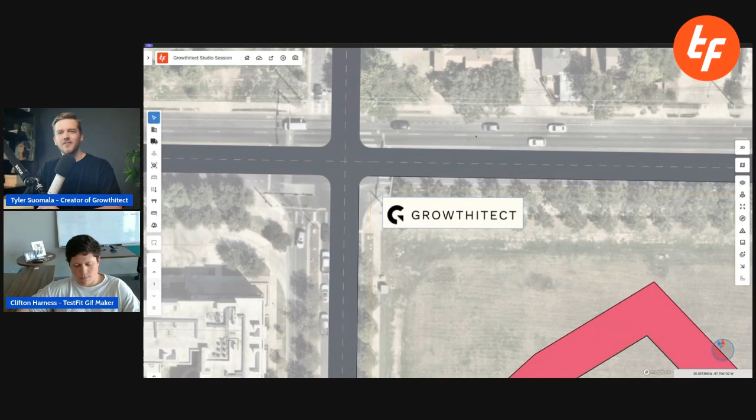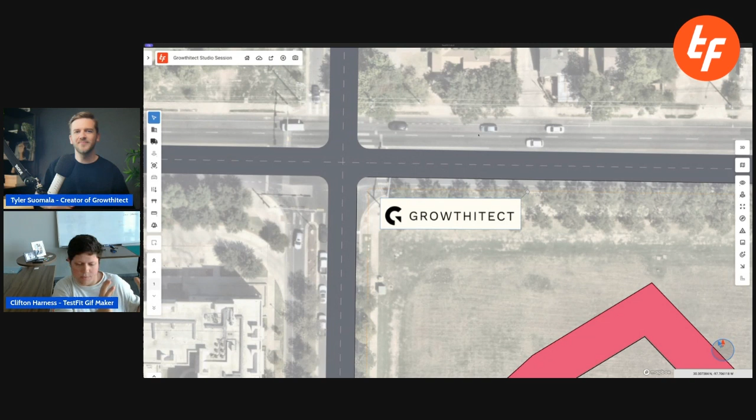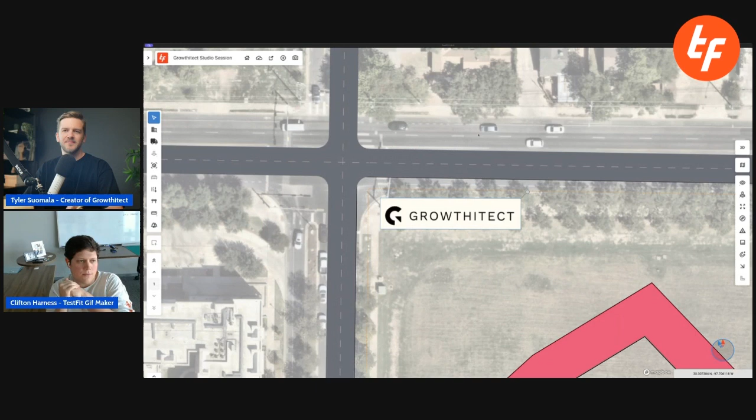Sounds great. So the demo has three main parts. First is Urban Planner, which is planning at an urban scale, trying to get blocks to be the right size, getting rough orders of magnitude in the right spot. Then we'll move into Site Solver, where you already have the block and you're trying to figure out the highest and best use building for it. And the last thing is generative design, where you already know what that building should look like, and it's a matter of running through 30,000 really bad options to find one you might turn into architecture. I'll start with Urban Planner.

The purpose of Urban Planner is that top-down view, looking at a big street grid. So this block right here is 8.76 acres, this block right here is 6.74 acres, and it's all divided by roads.

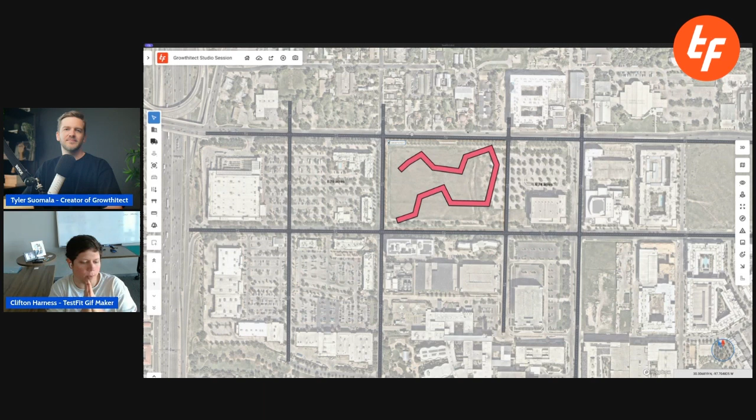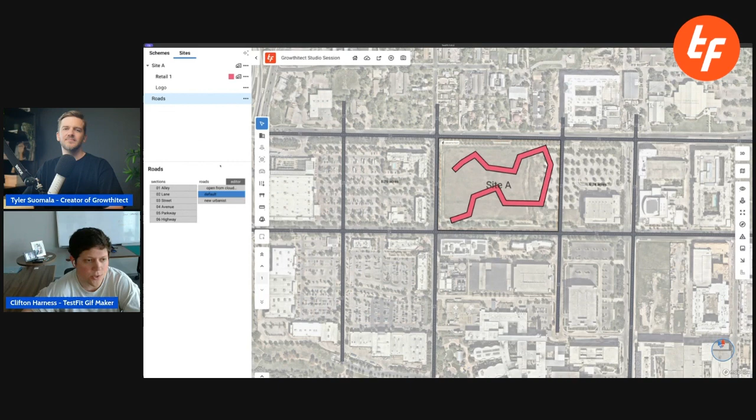You might ask yourself, why are you using roads? TestFit is based in America. We are car brained, we are car dependent, and the only way I can create software that people will buy is to respect the current process of being car dependent. So what we've built is a street section tool loosely inspired by StreetMix, which if you go to their website is a great open source project that shows different street sections and how they interact from a section view.

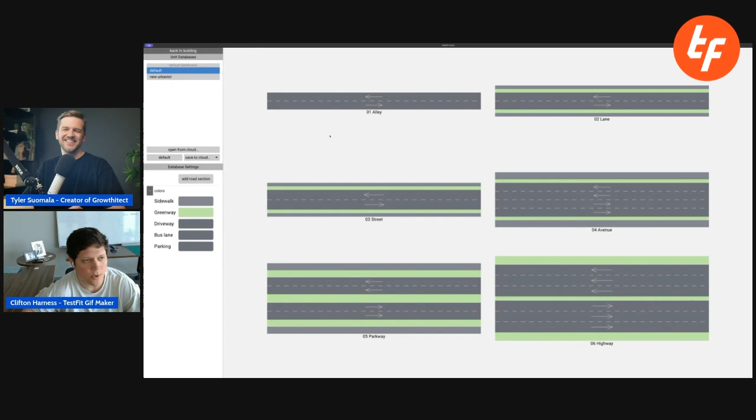What we've tried to do is port this into a plan view. So you can go into the editor and see we have six different street sections right out of the box by default. I'd be a fan if you don't start with highways everywhere, but likely you don't want an alleyway everywhere either. I was talking about the Robin Hood mentality — our goal is to get tools where we can do more new urbanist style street sections.

So I'm going to go into this avenue. TestFit is a parametric modeling environment, no different than building information modeling, which is also a parametric modeling environment. Our focus, though, is at a slightly different scale — building and up. Sometimes we do parts inside the building, but for the most part we're trying to stay at the scale of the building.

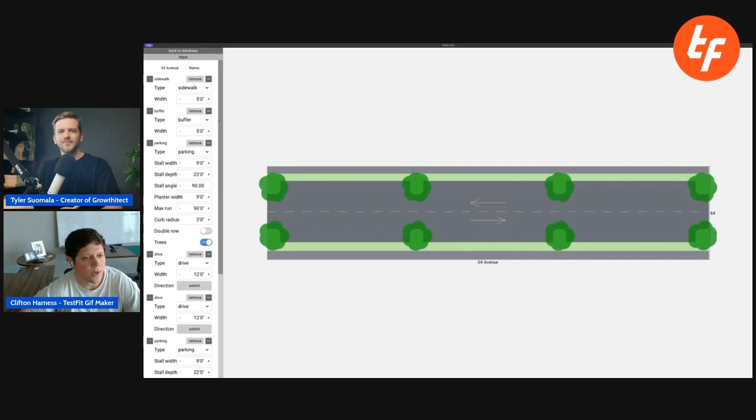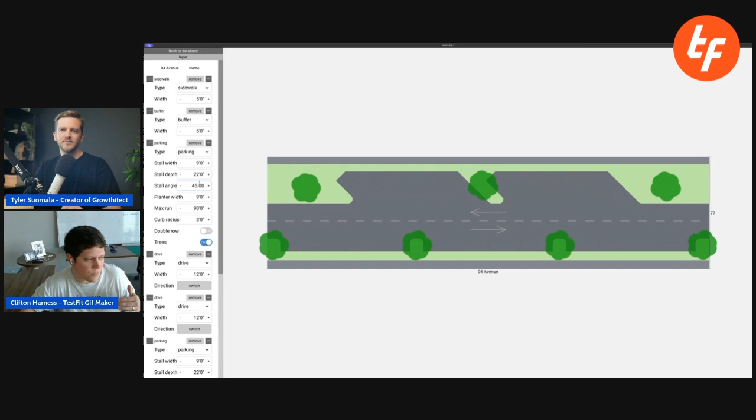So here we have just the street section — it's got a sidewalk, a buffer, and parking. To flex the parametrics, I can change my stall angle, rotate it to 60 degrees, 45 degrees. Any sort of flexible parameter can be codified in here.

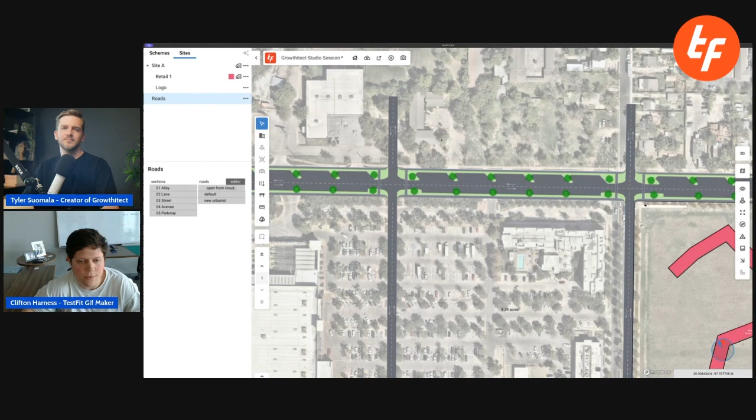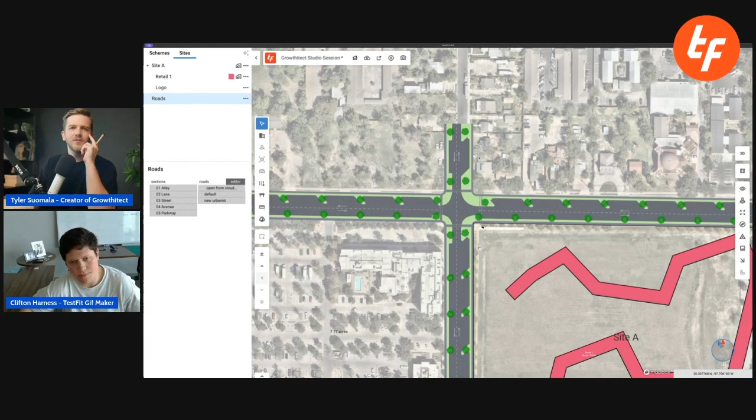Back in the site plan, I can change this type to 04 Avenue, and you can see that street section update. What we're also doing is generating intersections in real time — go to Avenue here and you'll see this street's intersection get generated in real time. This goes back to the fact that I'm not a civil engineer, I'm an architect, and I don't want to spend 900 hours getting the right turn radii and all this stuff.

I just want to draw a road. I was watching architects in their 50s and 60s roll out trace paper, and they could draw intersections really quickly with a flare tip pen. There's just not a quick way to do that in CAD — you almost have to call someone to make it look perfect, because CAD basically requires that you make everything perfect. So if we can get to a place where we're just moving quickly with the flare tip pen mentality in Growthitect, getting the intersections roughly sized right, we'll be headed in the right direction.

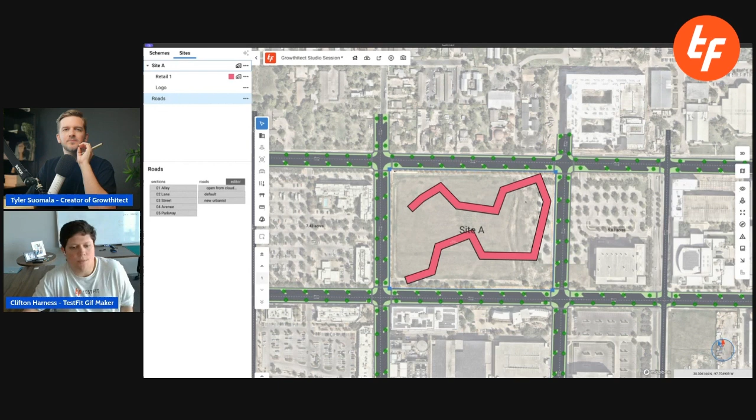So I might just march around this site and turn it all into slightly better roads. I can mirror the roads to get the parking head-in or back-in around my subject property — I'll mirror this one. So now what I'm doing is setting up how people will interact from the street edge section into this site, and we can start to think about the site itself.

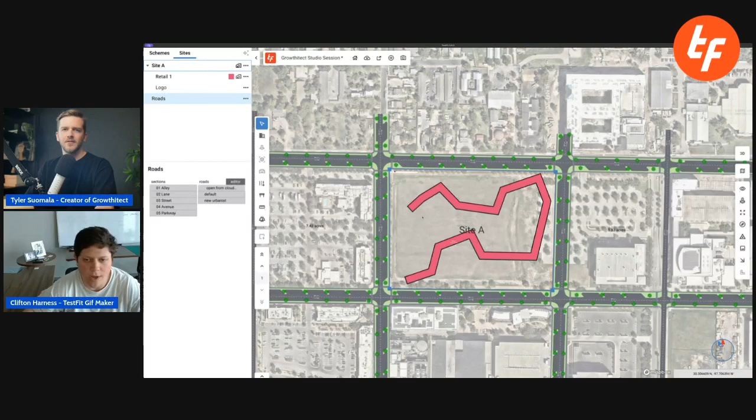So right now maybe I'll go into 3D, just take a look at it.

I don't know what my topo is. I don't know if I have any floodplains. I don't even know what my zoning is.

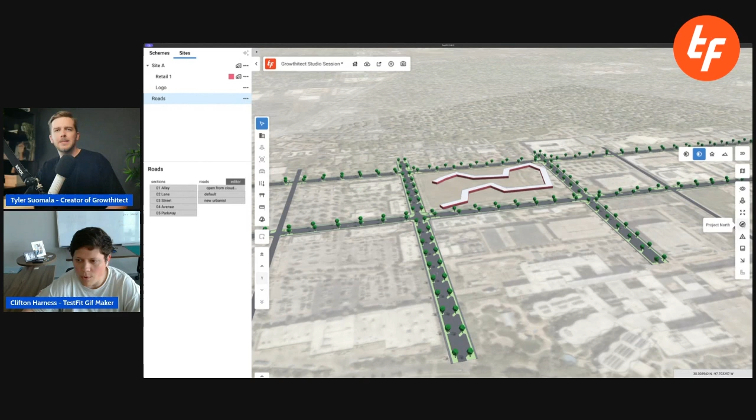So what we'll do is query some of these nationally available databases that we've worked hard to pull in. I'll turn elevation data on. This is a layer that can generate dynamically more detail if you need it to. The elevation increment is down to like 2 feet, so you can see really close contours.

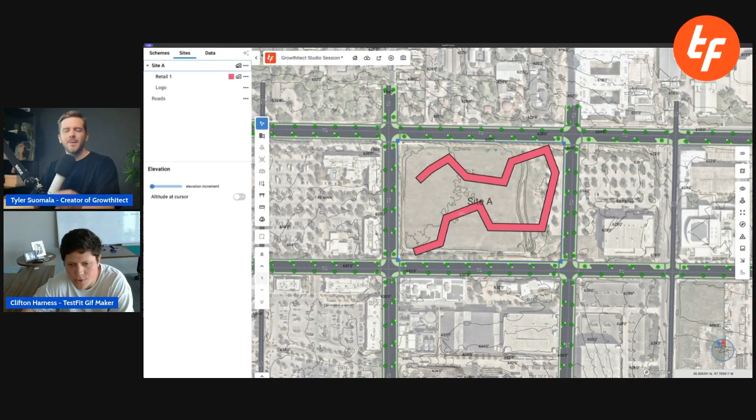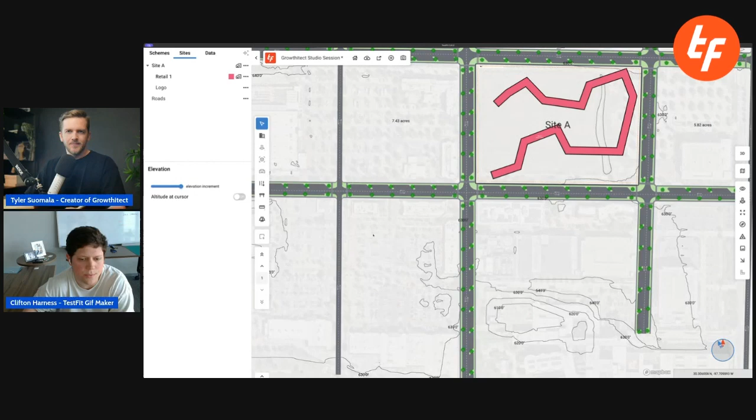But say you're working on a really large site with far apart contours. Lower the map down, change this to 10-foot contours. The goal is no matter what scale you're doing in Growthitect, you can get your contours to match the problem you're actually looking at.

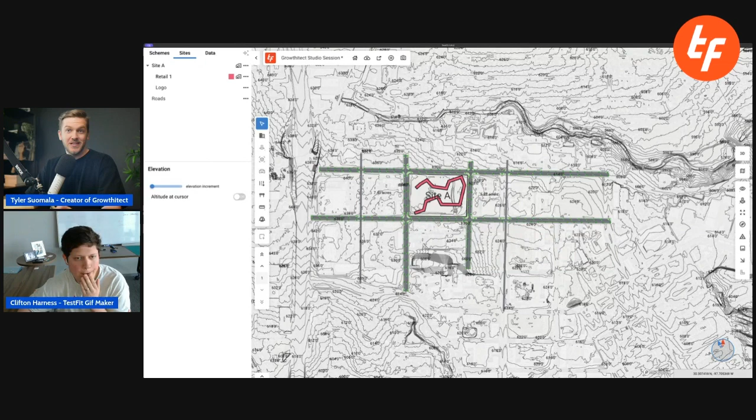And the other part of this is that there's something you're pointing to here, which is just to even get to the point where architects can start designing, there's so much prep work, so much information, so much data you need to pull in that can take a long time. Because that's a lot of manual effort and research, but you're saying it's here.

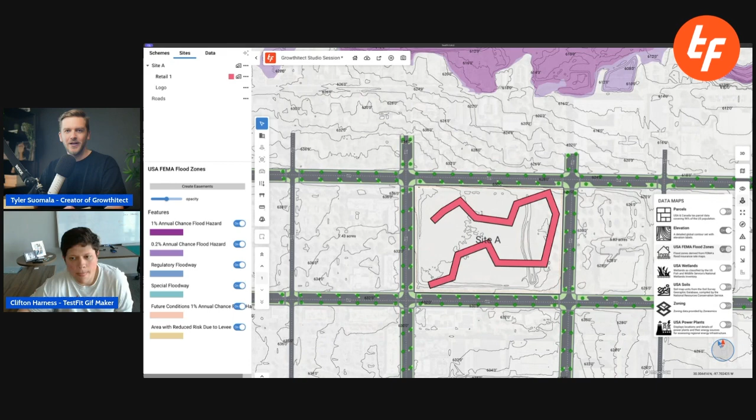But yeah, already just the ability to move around these roads, make those small changes, make it spacious like we want to, and test those boundaries of the site really quickly and effectively is already a huge time saver. And now we're bringing in data with just a simple toggle, which is pretty crazy.

Yeah, so I got fairly annoyed in professional practice always being asked to print out satellite imagery to scale so we could put trace paper on top of it. And it always was an effort because you're getting in the CAD. Sometimes it had great scales, sometimes it was just really bad, a non-standard way to do it.

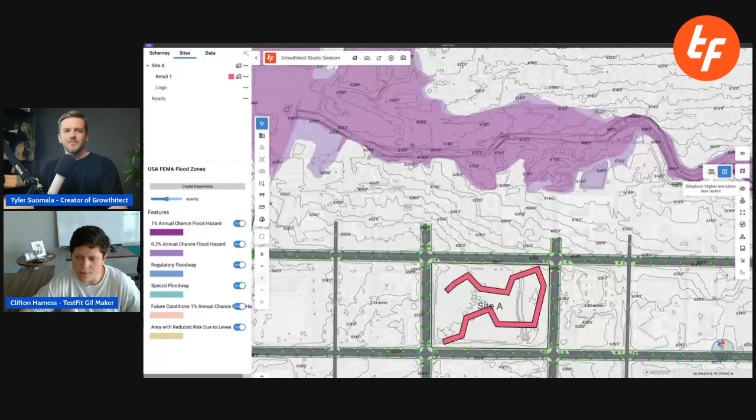And to your point, it requires that instinctual 30, 40 years of experience to be able to really do that effectively at scale. The guys that can sketch at 1:100 and know they're sketching at 1:100 without a scale are incredible, and you should shut up and listen to them. What they really have is in their mind, everything they want on the paper. The challenge is their body isn't moving fast enough, their hands can't actually move faster than the speed that they're going. I work for some of these people, they're the most brilliant architects around.

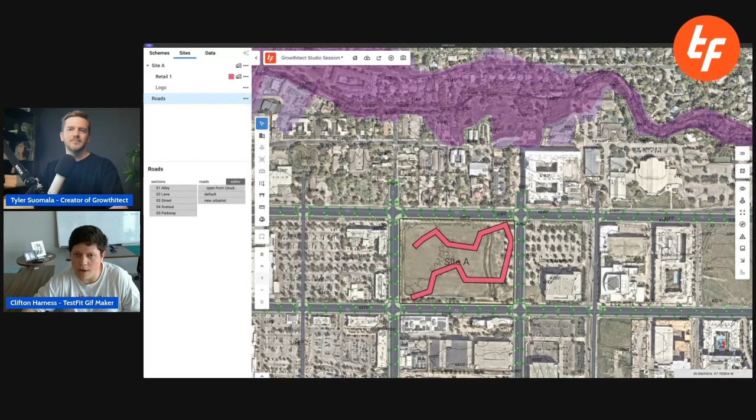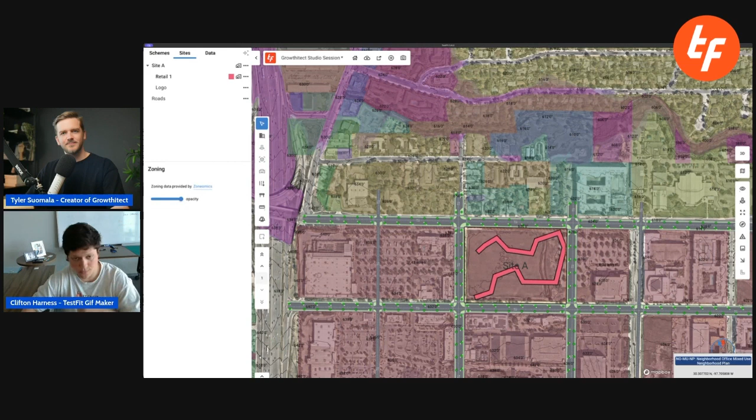All right, so we got FEMA floodplains in here, just as an example. And then zoning is the other one I'm going to show. So we partner with Zoneomics, and you can see all of the parcels change their color here. In the bottom right-hand corner of the canvas, you can see as I move to different zonings, the current zoning for that area. And if you have a site defined in TestFit, you can go to the site parameters.

And I'll close some of this stuff. Here we see it's a PUD, planned unit development. A lot of this stuff is not applicable because this is a PUD. So you might need to go to the PUD zone information to sort of ask or get clarity on what is in this zoning information.

So this is Mueller, it's a big, it was an airport in Austin. And I know that they're trying to have more FAR and more intensity on these sites. So our goal maybe is to figure out how we can get to 2 or 3 FAR on this site, keep it walkable, just with some bulks.

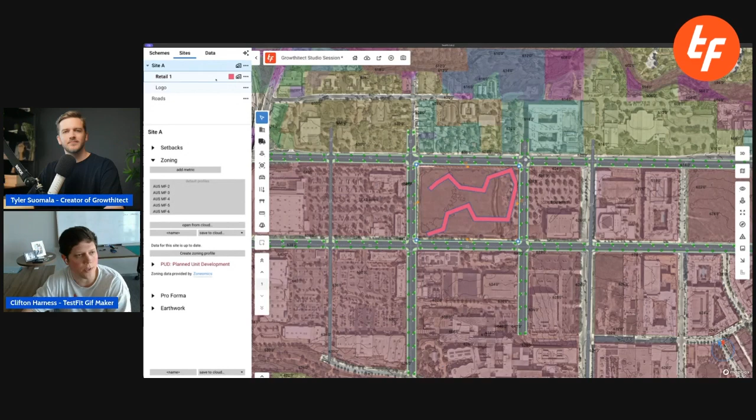And so what I'll do is I've got here a retail layer. TestFit is a layer-based modeling environment similar to Photoshop, and we try to manage typology versus morphology as effectively as we can. Typology is parking, office, multifamily, retail - these are all different uses, and the IBC likes to be very discriminate about how some of these uses work, especially with exiting and life safety. Versus the morphology, so the shape of the damn thing.

So apartments in the US tend to be 60 to 70 feet building mass width, and this has more to do with how IBC demands horizontal and vertical exits than anything else. Offices, if you're going to do a spec office—but nobody's doing spec office right now—are like 120 feet wide, and you have a racetrack all the way around. That's where you put your cubicles.

So the built environment, because of the way building code exists, will regress towards these optimized forms in the long run. Now, I went to UT architecture, a fairly liberal school, so every time I showed a 60-foot building mass width, they're like, why don't you care about high design? It's like, well, let's go change the building code so we can actually create really great, crazy different building shapes, right? But here we are, the IBC is still in charge.

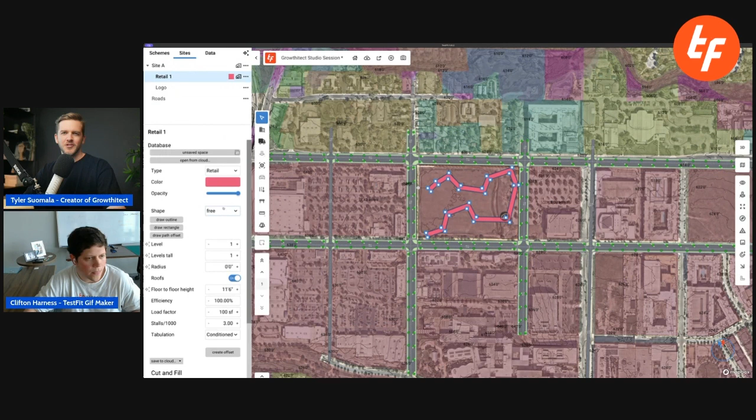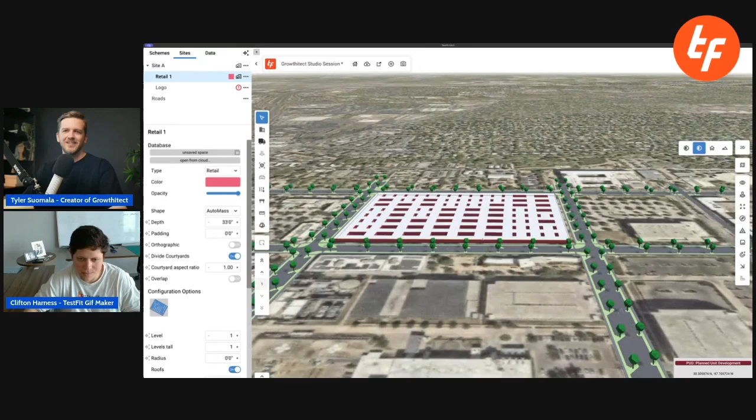So what I'll do is change... let's see here. Side note, you can start casting your votes for the TestFit building code—that's for sure what we're pushing people to at the end of this. There's Michael Eliason, I think, on Twitter—he's a single stair kind of guy, and there's some great ideas out there to improve life safety, but we're stuck with some of these laws.

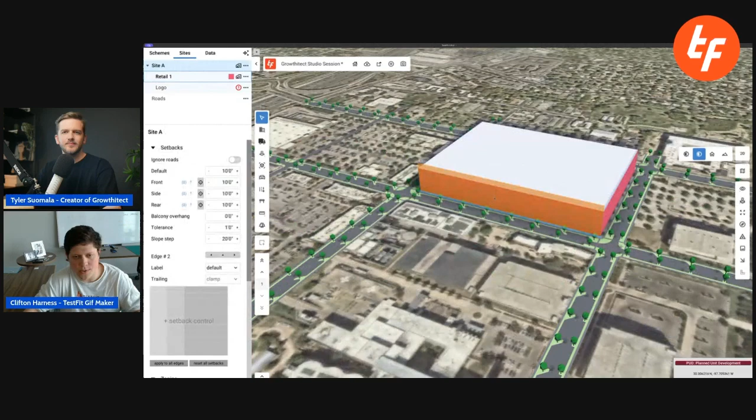So the first shape I'll go through is fill shape, which is just, hey, I want to push-pull the entire site, pushed off of a setback distance. So you can pull your setback information in, and here's just a big bulk. This is a fill type, used a lot, really good for manual control, if you want to have more manual.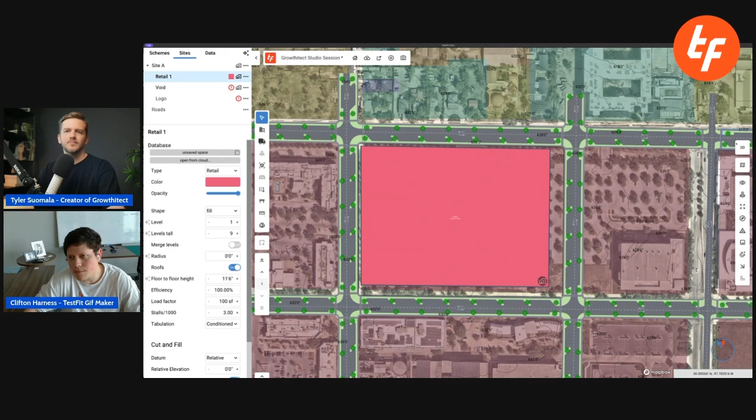So here what I'll do is draw a path offset, and I'm going to do a void, sort of a canyon through the middle of it. I'll change this type to void—needs to be that kind. Pull it up. And this void should give me a cut right through the geometry.

Failed to place. I'm not having a good moment with that. What a mess. Sorry, buddy. All good, we've all experienced that before, for sure. It's funny, I had it working right before the call. So we'll do a different void in a minute.

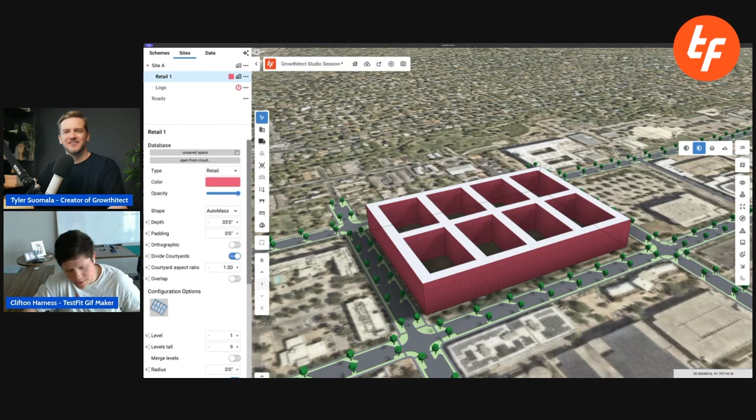So let's say you don't want to have automass, you just want to fill up the site with, like I said earlier, multifamily that's like 70 feet thick. I'm going to check the FAR here. I am at 2.34. It's retail, so if I change the type to multifamily, we've got like 1,000 units. So I'm overbuilt here—this is way too much density, this is not the right style of building here.

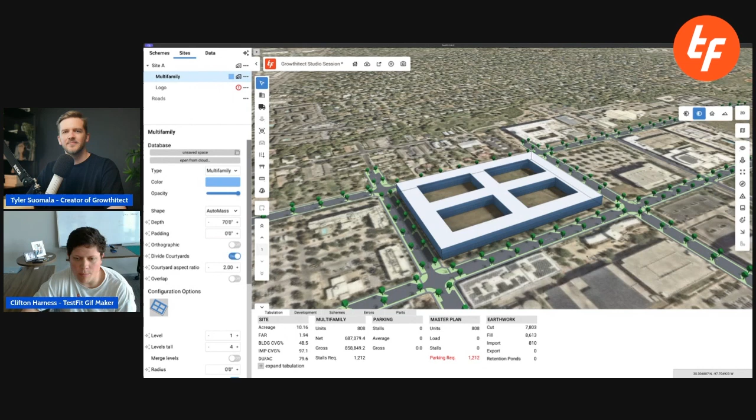And what I might need to do is change my courtyard aspect ratio, make the courtyards bigger. Yeah, and then I've got a better fit here. And I'm going to do that void thing again. Draw the outline, trigger generative design.

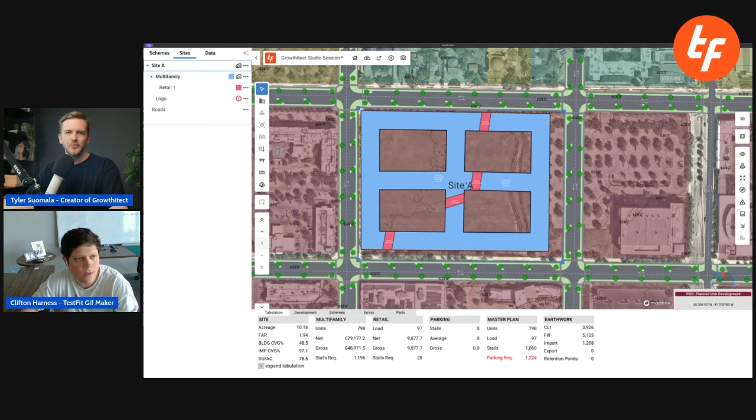And the goal with this, Clifton, is that we're just kind of exploring, right? There's morphology to your point before, but what we're doing is exploring it within the bounds that your client, the end user, the other stakeholders want to see, within their boundaries. Am I understanding that correctly? Right.

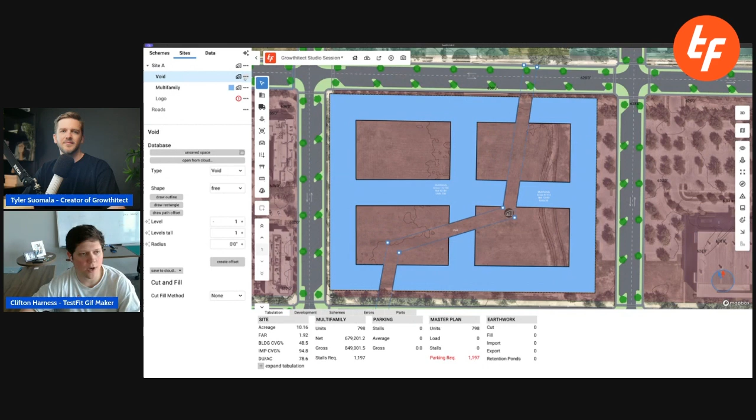So here I've got the void working. What I wanted was to break up my multifamily space with something different, and I'm trying to cut through it like a Nolli map, basically. I can't tell you how much I wanted these kinds of tools when I was working in development, doing urban planning problems but hopeful you could do more. And here, maybe some people would disagree with the actual form, but this sucks—this is way more interesting, right?

And just in the matter of a couple seconds, I'm here, and hopefully people will work with their counterparts in real time to sort of design. But me as a designer, I'm coming in saying, hey, don't make a big bulk form like that because it sucks for design—this is a much better kind of urban plan, right? And our goal is to give the tools like that fairly quickly and easily.

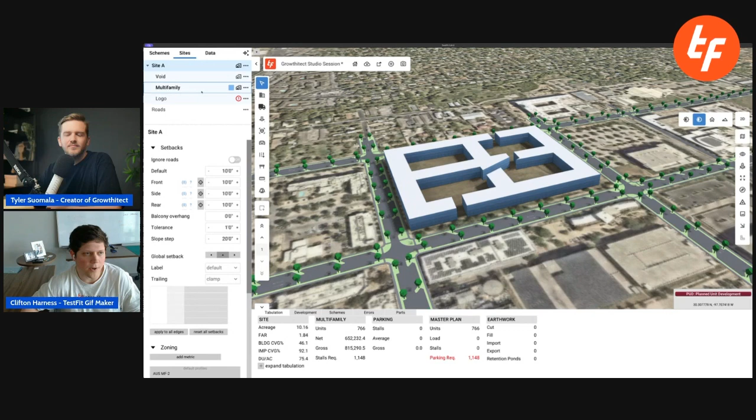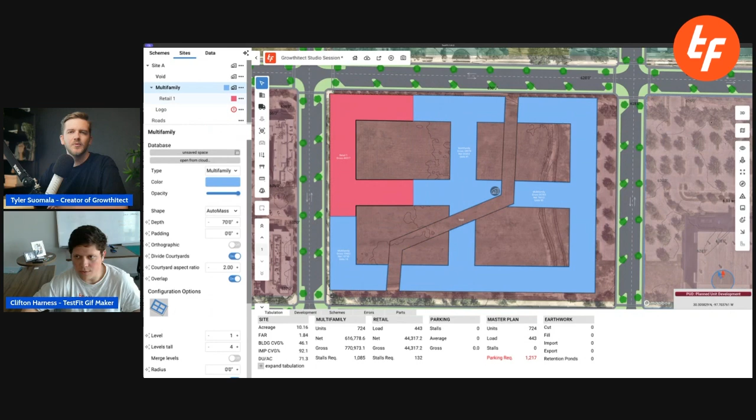I'm going to do another space here—I'm going to add a retail function into the corner here. And because this is layer based, it's going to assume the shape of the thing above it. So if you just want to carve out your retail space, you can. A lot of people are going to do probably a double height retail.

I'll drag that up and change my levels all to 2, then merge the levels. This is important - here's my retail load at 886. I merge the levels and it's 443. It's a double height space now. Looking at the unit count here and the FAR, it's starting to feel a whole lot better, like a real building. Of course, the thing we haven't done yet is parking.

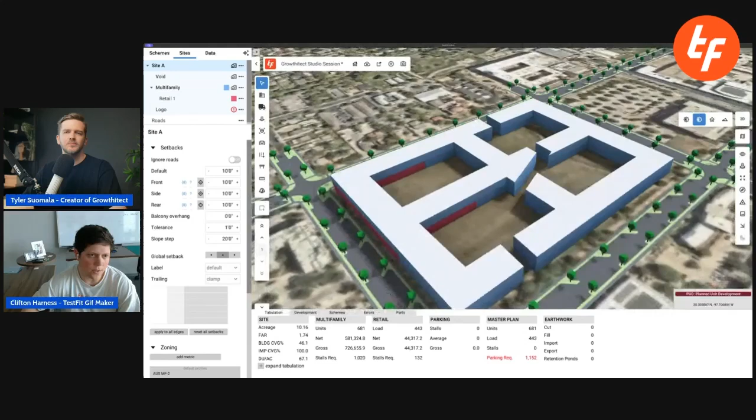So I'll add a rectangle parking space. Is there any questions? Everyone's just excited about what you're showing. I'm not seeing questions, but drop them in because I do really, really enjoy aggressively interrupting Clifton whenever I get a chance to.

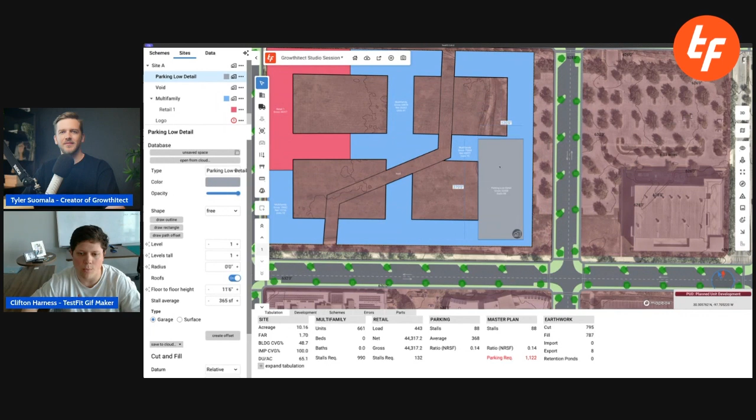So here's a garage. I'll go 120 wide and 270 long, so I get kind of one ramp on one edge. Change the height there, and I'm at 0.61 parking. I need a lot more in this Texas-based city, probably, to make it a successful deal.

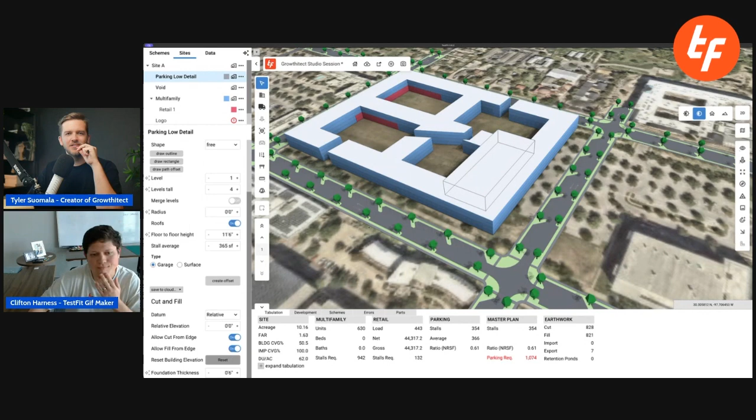You guys usually see undersized parking spots. I'm wondering if in Texas they have oversized parking spots - does that exist? You got to be able to fit those trucks around there. The Autodesk Forma team came to Dallas one time, and I drove them around in my Toyota Tundra. They took pictures of it.

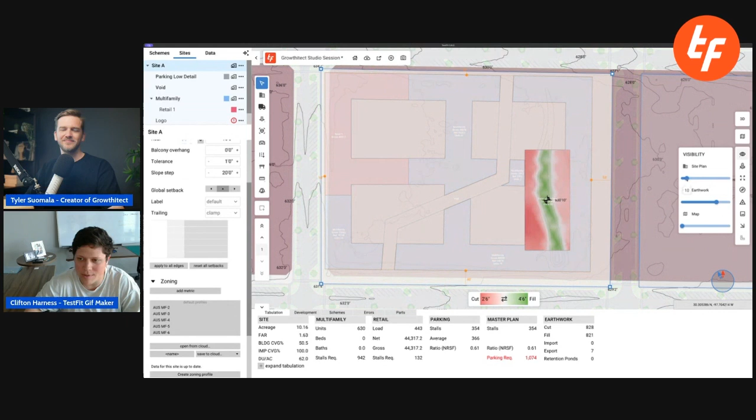That's okay, awesome. So let's talk about dirt - maybe skip dirt real quick, but while all this has been happening in the background, we are trying to run some real quick analysis on cut and fill. So here you can see just under the garage pad, a bunch of cut and a bunch of fill based off of where that elevation should be.

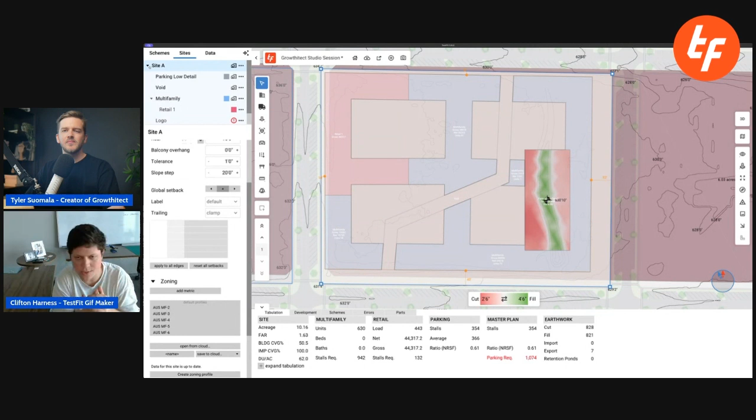And then in the master plan level, the earthwork - we're trying to derive, especially when we get into site solver here in a second, we're automatically cutting and filling stuff to try to be accurate to civil engineering. So that way we're not laughed out of the room when we propose better architecture, I guess. This is something that's relatively new and absolutely growing for us.

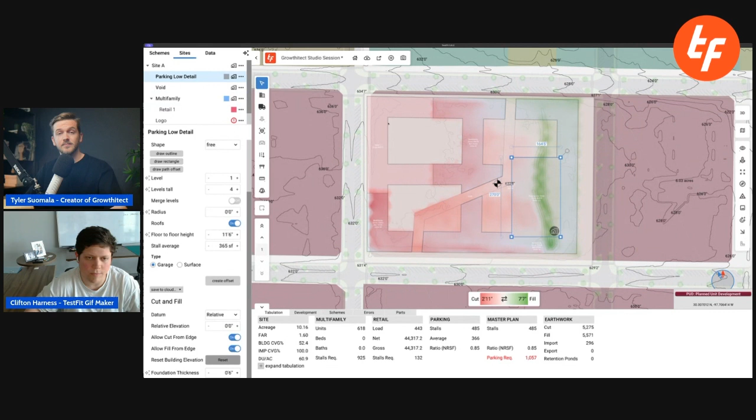But here, we got it applied to the whole site. You can see it running in real time. You see all of the fill needs to go into this gully and all the cuts coming from everywhere else. It's just handled - you don't need to do anything.

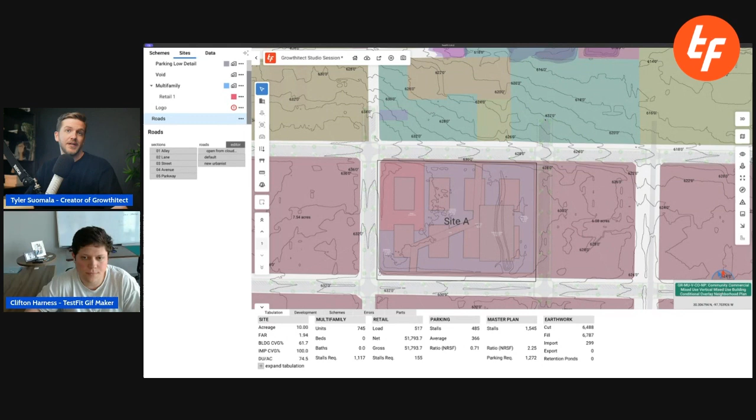One question that just popped in from Natalia, wondering if Enscape or any other renderer will be integrated in the future, or if it already is. We are...

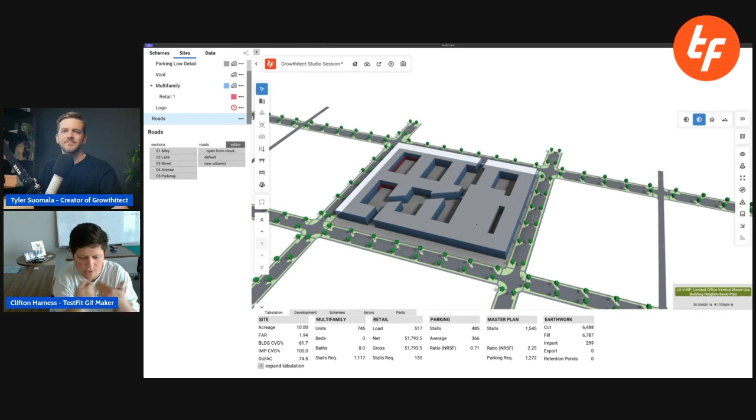Force us to focus on geometry, and 30 other startups will do the visualization stuff. I've really... I'm really annoyed with AI rendering because it might be really good, but I'm also really annoyed that Enscape was on the rise and gave architecture a lot of control over how we're presenting this information. And the two are really at odds with each other.

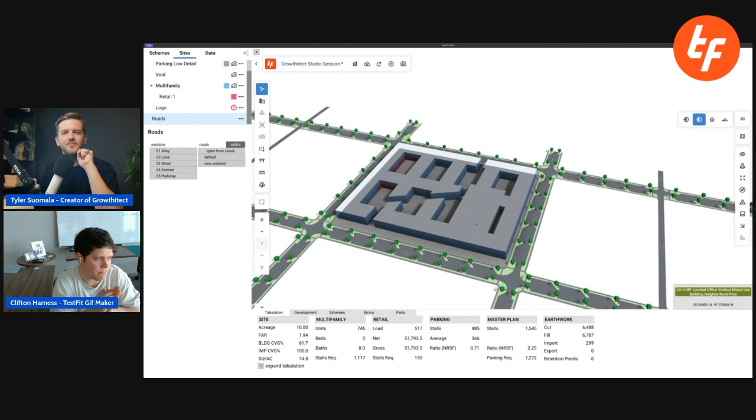And I'm trying to stay out of it for as long as we can. I mean, we will have to at one point automatically wire up to some of this stuff - we've tried in the past. Yeah, I would say export to OBJ or something - you can pull it into any renderer for right now. It's a good question.

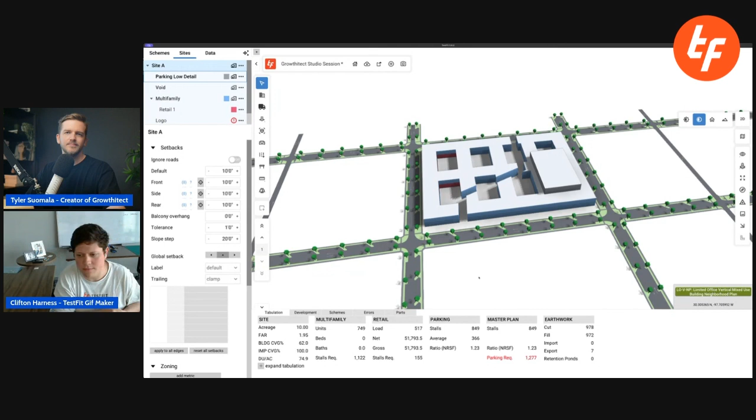And hiding it under a bush will tell the real estate developers that you're fearful of this technology. In reality, I think architecture, because it has to deal with so much technology now, is probably the only core group of people that will wrap their minds holistically around this stuff. We'll get into the generative design stuff at the end, and then people can draw their own conclusions.

So this is sort of all the manual stuff that we have. You can come in and use it. I think it's $1,200 a year, maybe, for all the stuff I've shown so far.

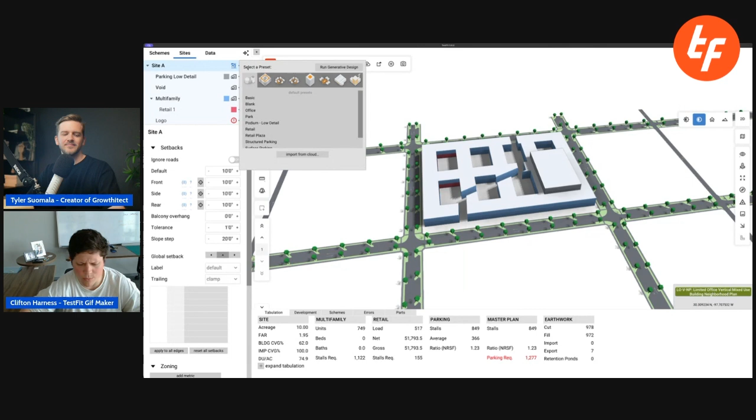Might be a little bit more expensive with the zoning information, but just to put that into context - does this save your team 5 to 10 hours a year? Because if it does, it's worth it. It pays for itself many times over after that.

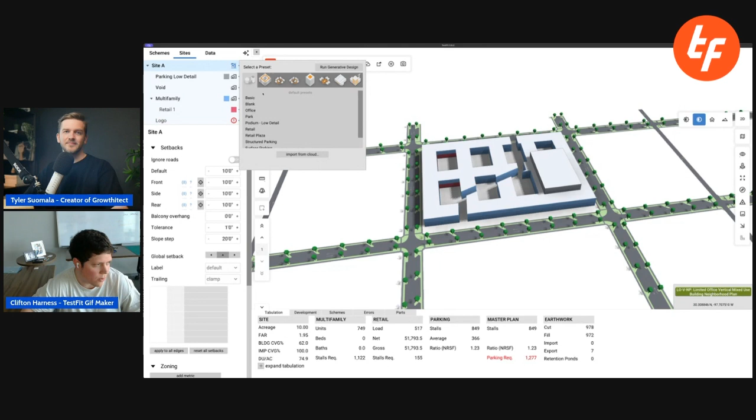And so, yes, if you buy it, I will raise money leveraging the subscription fee like 40 times more than what Autodesk could, so like...

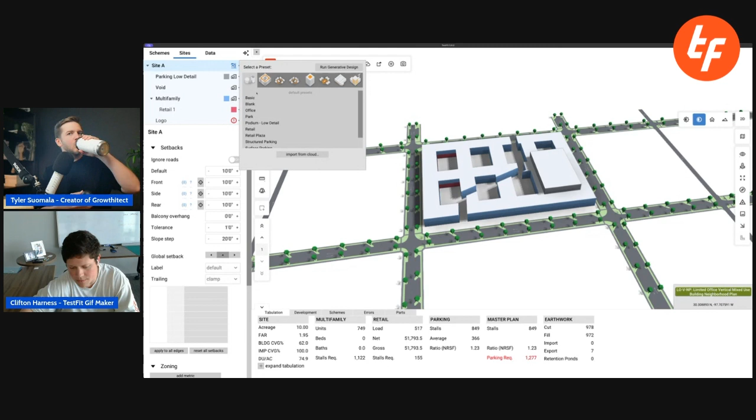All right, so I talked a big game about morphology and typology. Where we come from, our core DNA is Site Solver. We will continue to put into Urban Planner all of the manual tools and some of the automatic tools we create. But Site Solver is where we make the vast majority of our money right now, and it does stuff like this.

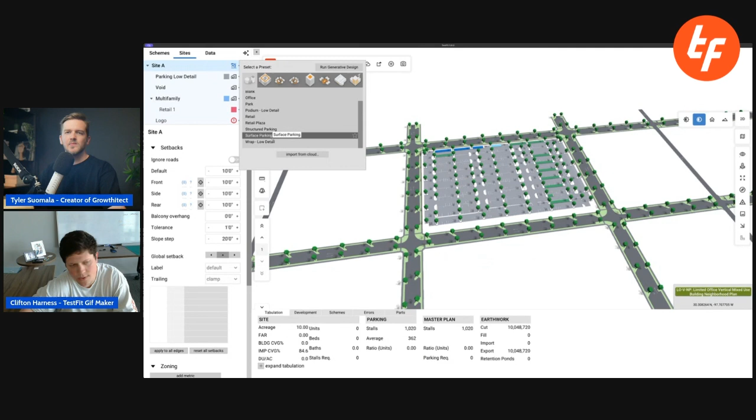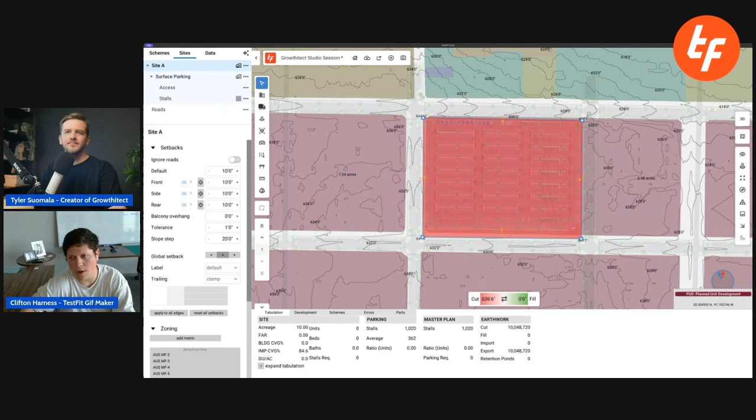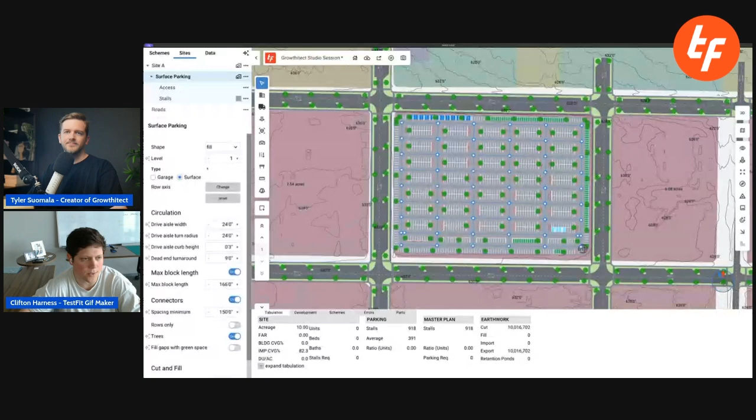Get back to clear view. So here, I click the parking. This is by far, I think, our most valuable weapon to architecture - the elimination of doing this as part of your job. Like, I hated drawing parking so much, I can't tell you how much I hated it. But here we just have a very simple algorithm that runs through, decides a lot of decisions very quickly, and it's parametric. So you can say, hey, my max block length is 166 feet, you can turn that on and off, right? It's just parametric - it's as smart as the information you give it, and as dumb as the information you give it.

The other typology we have is higher density. So moving on from parking, right - this is garden, 4-story surface parked. I'll just cycle through. Here's infill podium, where that courtyard aspect ratio is set absolutely incorrectly, right? So give me an option that doesn't work - a lot of these options.

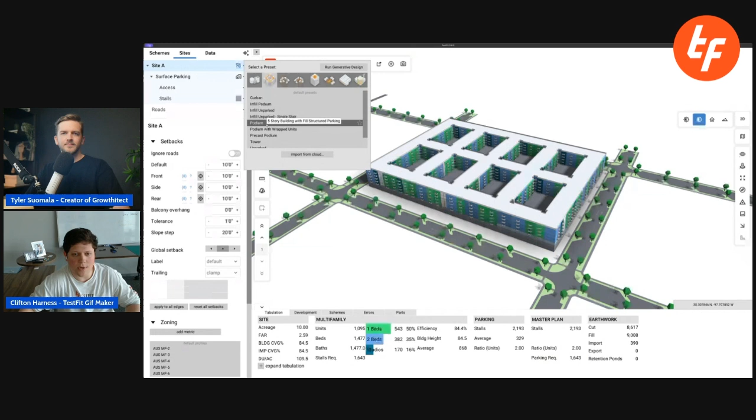All right, here's a podium deal. This is probably, I don't know, 30 to 40% of American housing - these 5 over 2s. Here's a precast podium - the difference here is that it's only going to do a garage that's two bays wide.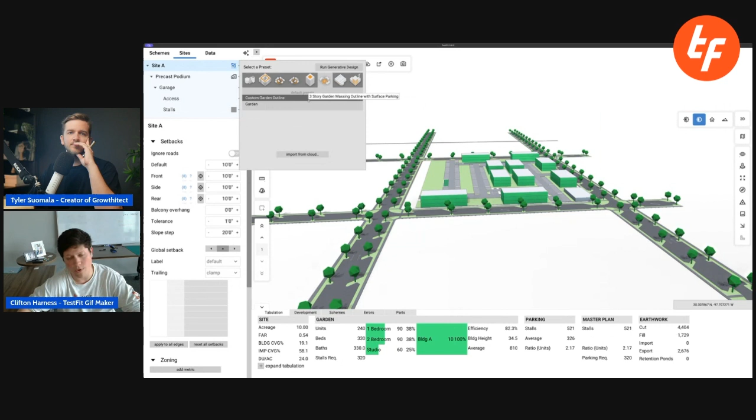And then there's all of the lower density stuff - parcel based solving, which is like single family homes, office core based, garden apartments. Garden apartments is like 30 to 40% of the U.S. housing stock. When we had similar interest rate problems in the early 2000s, a lot of architecture firms made it through recessions doing these.

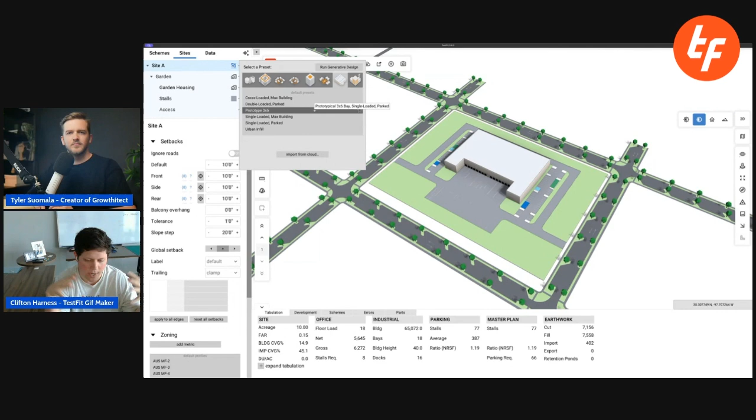Let's see, industrial - these, you don't see in new urbanistic deals. Probably not going to spend too much time on this, but we're trying to get the largest possible fire trucks to access a rectangular box on a site. And then data centers is kind of the newest and latest - these guys are trying to build buildings that cost like $1 billion. It's absolutely insane.

While you're jumping through this, Clifton, I'm curious - I'm assuming you probably have what we would consider to be the right answer, because I don't even know how I would answer this - but how do you all view the difference between parametric design, generative design, and artificial intelligence? Where are those lines drawn, and how does that play into the strategy here?

Yeah, so the language for AI in architecture doesn't exist yet because the parameters don't exist yet. TestFit has the most parameters of anyone - we're at like 300 or something. So the only way I see AI realistically weighing in is we need to keep building really high quality configurators, and so many of them. And it actually needs to be a partnership with the architecture community, because you train the AI on the existing building stock, and architecture is literally just thousands of compromises.

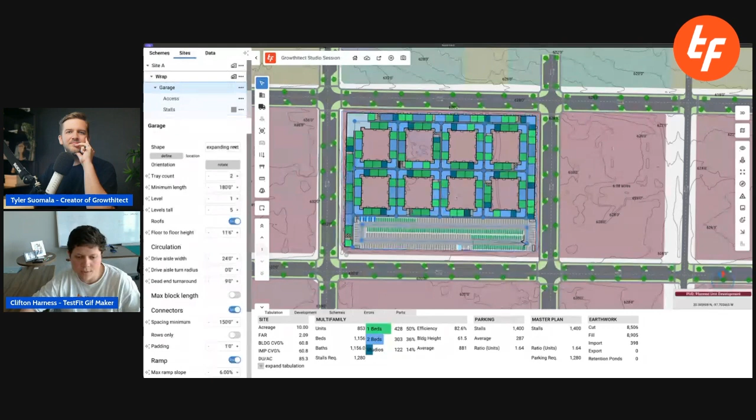But first I want to show one very specific thing with SiteSolver, which is right now I have this garage that every architect is like, the hell is that doing there? I'm just going to rotate it, plug it here in the corner, and now I've got it lined, and it's a lot more palatable.

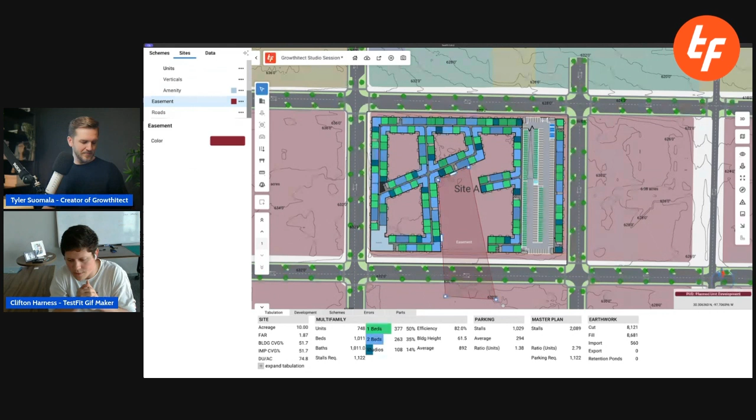Another thing I'm going to do is add an easement in. Say you might have a utility or power easement. This thing will come in and it'll just bomb - it'll literally destroy any geometry in the way. Working in development, I got many site plans that had building on top of easement. So all of these little manual design tools that we've built compound.

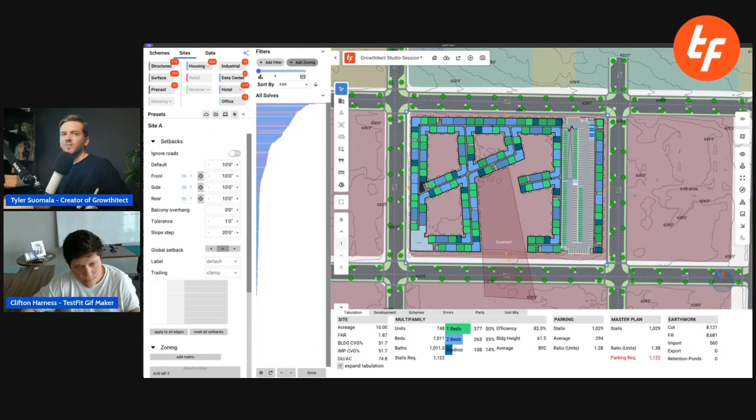And that has given or enabled us to have the right to do this, which is to run generative design. And right now we are solving in the background so rapidly that we are getting, in some cases, here's 1.5 thousand possible housing solutions.

Make it bigger, maybe. So we don't say we don't need more housing - we've got it, dude. Right here. It's right here at TestFit. This is, we created 5,000 metaverse apartments. Boom, just like that.

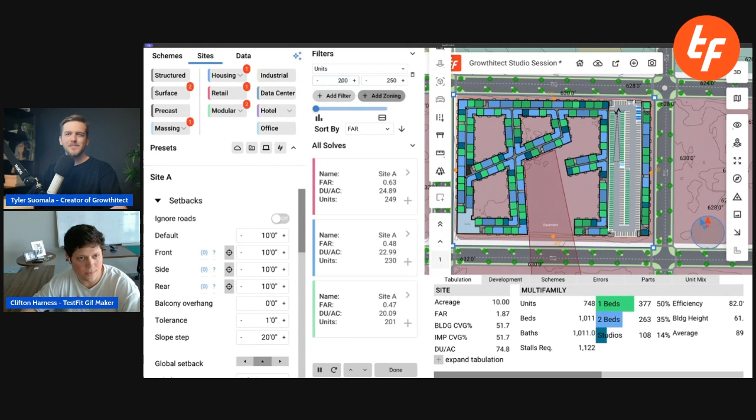Too soon, maybe. So what we need to do is add filters. Maximum 250 units, minimum, I don't know, 200. And so when I do that, it's killing everything that doesn't create units or keys or mods, and it's pulling in some mixed use stuff. But here is a bunch of stuff that's generating around that easement. Most of it is garbage because I need to give it, guess what, better parameters.

And I think TestFit died. Yeah, that's a great way to end it. That was generative - you actually forecasted that, right? You said it's going to get so complex, so many inputs, that the AI cannot handle it. Right, so now our computer science problems are more geared towards search in addition to geometry.

And then there was Peter's question about when it comes to importing - does it convert a PDF import into raster or vector? Most imports are rasterized. We spend our energy on the geometry, and there's a way to do metes and bounds as an input, and a way to pull in Revit geometry as a site plan input. You can create a TestFit save file from our Revit plugin, and that'll generate a property line. There's a lot of ways to do vector, but it's not our primary way.